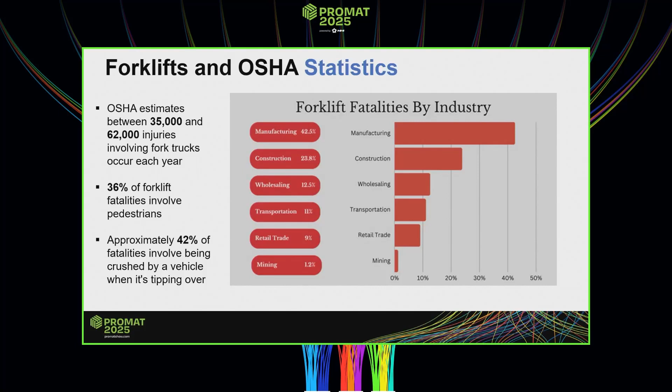Some forklift and OSHA statistics directly from OSHA: they estimate between 35,000 and 62,000 injuries involving forklift trucks each year. Manufacturing leads at 42% of all fatalities by industry. 36% of those fatalities involve pedestrians, meaning someone not on the forklift, and 42% involve a forklift tipping over. These are horrible statistics, but I think that's what makes us passionate about educating to help prevent those and give you solutions to help drop that number as close to 0 as we can.

So when we break it down into the 3 categories—your people, your product, and your place—first, when selecting your barrier or identifying the problem in your facility, you need to identify the hazardous areas. Where are the areas that are non-compliant that could be hazardous to your personnel or equipment? What resources and solutions are available?

When looking at these first 2 options, consulting a ProGMA member right off the bat is a great option. I know we're all willing to come out and consult to guide you in the right direction on where we see these hazardous areas. Finally, how do you select the right solution and vendor? Again, if you have someone available to consult you through ProGMA, it should give you the right solutions and vendor, talking through the problems you may face.

Once you implement the solution, you can look at whether the implementation reduced the hazard. Also understand if there were any unidentified consequences or benefits to that solution—it may have slowed down operations, but in the same sense, you protected against an incident. And finally, how do you quantify your ROI?

And your return on investment. So for considerations for ROI, we're talking about people, and we're talking about injury prevention.

Personnel commonly need access through the facility through potentially hazardous areas, whether that's the shipping receiving dock, manufacturing, or production. They may be walking in the same area as forklifts, AGVs, pallet jacks, production equipment, manufacturing equipment. If they're walking along elevated surfaces, whether that be racking or mezzanines, products could potentially fall off those elevated surfaces and strike the employee.

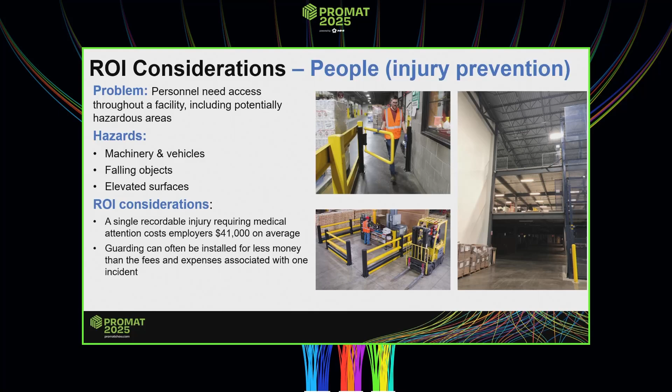So when you consider ROI, a single recordable incident requiring medical attention is $41,000 to the employer on average. Guarding installed in those areas can often cost less than one single incident with one of those employees.

On top of the injury costs, you have days lost with employees. This is all work-related injuries in 2022, not just forklifts, not manufacturing, all work-related injuries. 108 million days lost in 2022 due to injuries. The injuries that happened in 2022 caused 75 million days lost. Injuries from prior years that rolled into 2022 was another 33 million. And in future years, they estimate another 60 million days lost from 2022 injuries.

And there's a cost associated with those, $167 billion cost to the employers. Per worker, it's just over $1,000, and per fatality, it's just under 1.4 million.

We're talking about the product, we're talking about your inventory protection. So protecting your inventory, whatever you're distributing or manufacturing. Estimates suggest that 1% to 2% of all warehouse inventory is damaged by forklifts annually.

73% of our facilities reported losses due to damaged product based on forklift impacts. While we don't understand the value of your inventory, it could be computer chips, it could be paper towels, we don't know, but that's a good way to calculate ROI - by knowing the value of the product you're shipping out or receiving, because it could be a scenario where one single prevention of an impact could pay for the guarding itself.

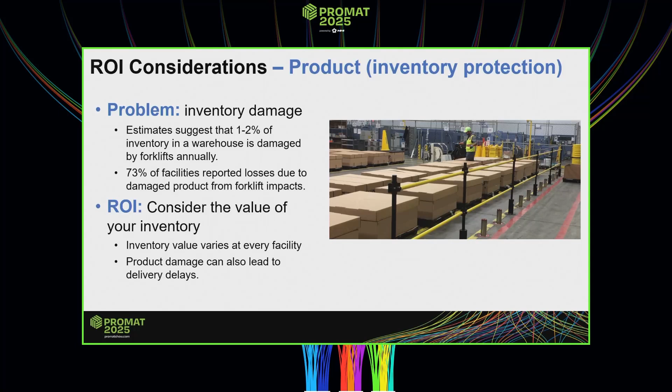And not only are you protecting your product, but there could be additional consequences of delivery delays, lost contracts, lost sales. And finally, the place, talking about your facility.

And this is the widest variety because there's a whole lot of things that fall into your facility. We're talking about building infrastructure. It could be columns, electrical panels, walls, floors, production equipment, manufacturing equipment, the loading docks.

This one speaks to me just from loading docks specifically. We had a customer that had a smaller facility, about 8 doors that ran 24/7. They had a door that got damaged - it was hit by a forklift. That door went down and they called us out for an emergency. It was an emergency because they told us that if their door is down every day, it costs them upwards of $20,000, because they cannot ship product out of that door.

So again, that goes into the opportunity cost of the downtime. If you strike a piece of manufacturing equipment, how long is it going to be down? Is it going to be a day? Is it going to be weeks? How long is the repair going to take? So those are all opportunity costs.

And then if you continue to do this and not protect your product or your place, insurance premiums are going to increase. And then maintenance costs is directly tied to what barrier you select. Whatever barrier you may put in place to protect your place, is it going to get damaged if it gets hit? Are you going to have replacement rail costs? Are you going to need painting and maintenance on those? If it gets hit, is there going to be concrete damage?

And Dave, I know specifically you have some firsthand experience from concrete damage of what you've seen with your customers. Yeah, I have. It goes back to just the downtime and the opportunity cost that's lost as a result of the concrete being damaged. I think it often gets overlooked, the complexity or the time with concrete damage.

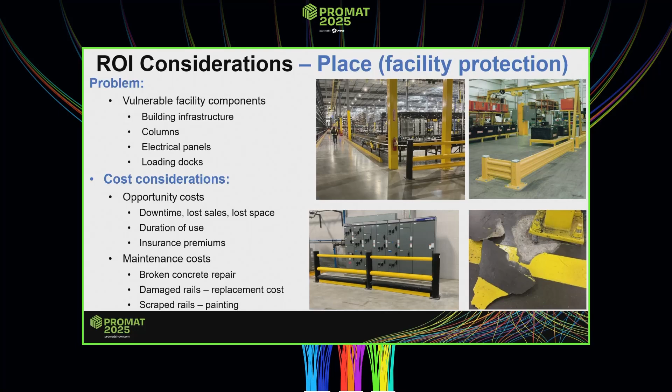For full concrete to go through the entire curing process takes up to a month. So to do it right, there are a lot of considerations that need to take place in that respect. So all things to consider when you're thinking about selecting the right barrier. We're going to get into some specific examples involving your people, your product, and your place.

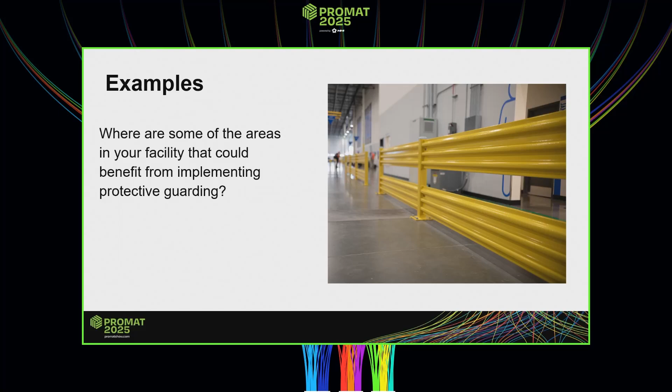Now we're going to look at some specific scenarios where you can preemptively install some protective guarding to get the best return of investment. In the material handling industry, we're trying to maximize the cube. That's where you get a good return of investment. So you're building up. You're building these structures for storage, for work platforms, production areas.

And when you're building structures up, you want to make sure they're properly guarded. So you obviously want to have guard railing around the perimeter of these structures once people have access to get up there. Oftentimes, you'll have an opening in that railing where you're transferring palletized material up and down with a lift truck, and you want to make sure that those areas are properly guarded.

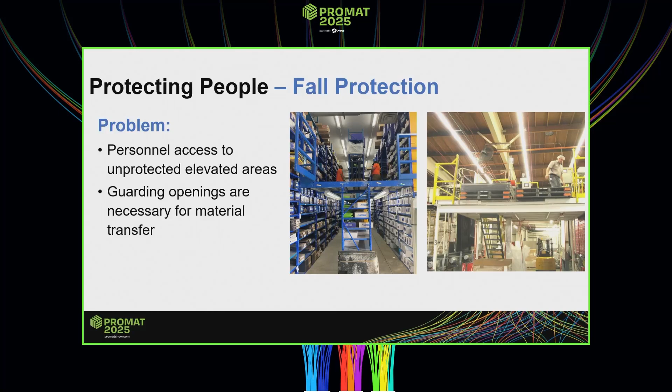So you always want to follow the OSHA codes whenever we're dealing with any type of fall protection hazard. For anything involving falls, it goes under OSHA code 1910 for floor openings and wall openings. And they want a barrier to be in place at all times except when you're actively moving material through there. Now, the thing about OSHA is they're covering a wide range of scenarios. They're not specifically talking about pallet drop areas. They don't specifically target scenarios like that.

So I recommend people follow the ANSI standards whenever you have any question about what you should use for guarding. ANSI standards are written by professionals in the industry. They target very specific hazards and very specifically tell you how to address those hazards. You can't have an ANSI standard that violates OSHA. So if you're following ANSI, you're following OSHA.

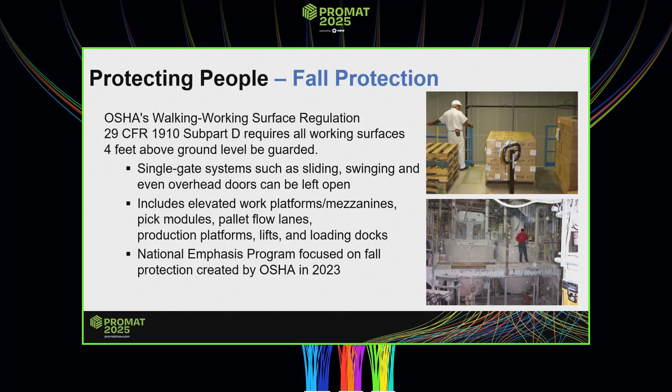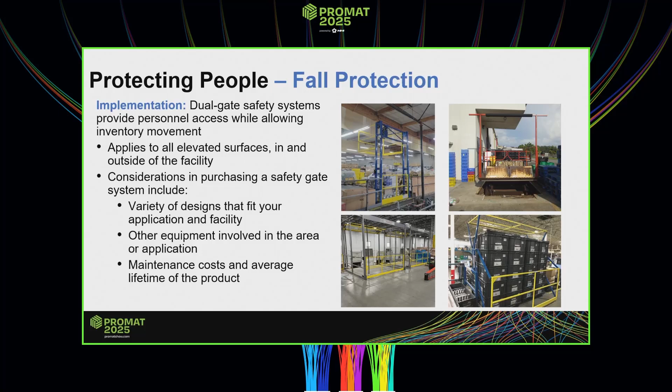ANSI in this case has a standard involving securing pallet drop areas on elevated levels. And they want you to have what we call a dual gate system, which is a barrier that's in place at all times. What that means is you have a gate at the ledge, you have a gate behind the pallet, and the gates are interconnected, so one gate is always closed. And that way, no matter what stage of the operation you're in, loading, picking, whatever you're doing, you have a barrier in place and you're sure to meet OSHA requirements.

An opening on an elevated work platform is considered an OSHA violation. That's a willful violation. That's a $15,000 fine for every opening, every time it's open. I had a customer that had a powered single gate that went up and down, and when OSHA came in for an inspection, that gate was in the open position. They said, oh, that's a violation.

The inspector said, no, the person working in the plant said, no, I can just push a button and that gate closes immediately. And OSHA said, no, that's not the way it works. We come through when it's open, that's a violation. Fortunately, in that scenario, they put in a dual gate system and they abated the fine.

But we're talking about these $15,000 fines for willful violations for every opening, every time they're open. And that's without someone getting hurt. I mean, if someone gets hurt, it's a whole different ballgame. You get lawyers involved. They might shut the plant down while they're investigating it. So you always want to have this protection in place, and you want to do it proactively before you have an issue. You want to consult with people at the ProGMA so what you're getting is going to fit your space constraints and what you're bringing up there in terms of material.

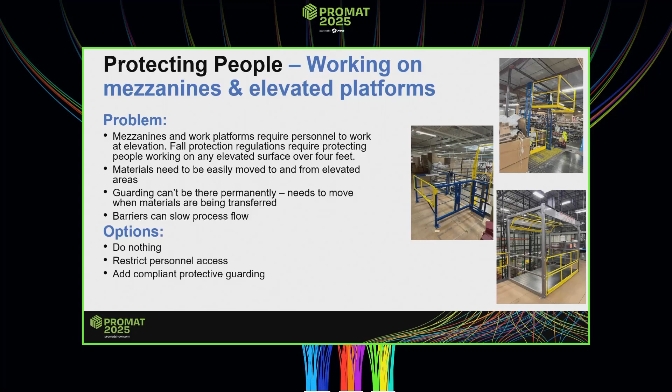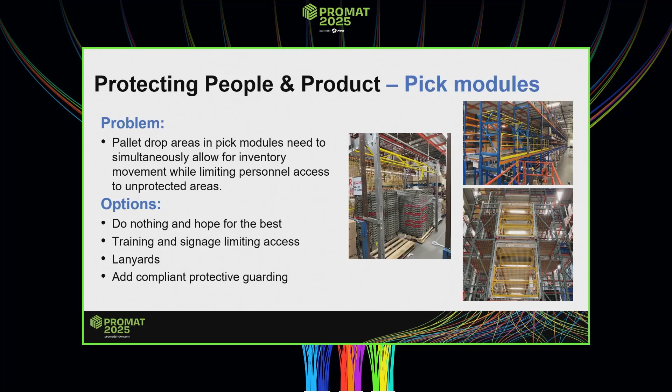And I tell everyone, when you're in your plant or in someone else's plant, you always want to look up. That's where these hazards come in. So we were looking at mezzanines and elevated platforms. The same hazards apply to structures made out of pallet rack, what we call pick modules. These are systems made out of pallet rack that people are working up in. They're breaking full cases and knocking them down and reducing them down into smaller packages. And those areas, if they're over 4 feet by OSHA code, they have to be guarded. They should be guarded that same way with a dual gate style system.

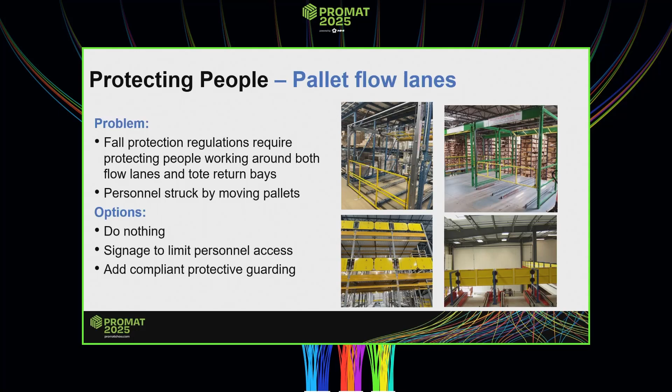We also have that same scenario with pallet flow lanes. A lot of times you'll see these on elevated levels where it's multiple pallets deep being pushed into a flow system, 2, 3, 4 pallets deep. If they're above 4 feet, they should be guarded. Even though people aren't working at those ledges because the pallets are flowing to them, if they have egress to those ledges, they should be guarded, and they should be guarded proactively. You can do that with a dual gate system, so there's always a gate in place, or a pallet flow gate device that's a self-closing gate that will swing open when the material flows in and then close behind them.

Again, when we talk about looking up into these areas, even if people aren't up there, we're maximizing the cubic space. We're building these rack structures to store products, and the concern is products coming out and hitting people walking down below. So you want to make sure if you're storing pallets in a rack system that you have some type of barrier in the back of the racks to contain those products.

The two main ways to do that is with a netting system that stretches across the width and height of the bay, or with a steel mesh system. What works best for you really depends on what you're storing and your process, and that's where you want to reach out to folks at the ProGMA for the best solution.

Now I'm going to turn it over to Dave Dulesky, who's going to be talking more about securing utilities and facilities. All right, thank you very much.

So for my slides, really what I just discussed is talking about sort of the gotcha areas within your facility and the impacts that can have on your business in terms of disruption. The first area to discuss are those utilities - your electric cabinets throughout the business. I would also argue your IDF closets need to be considered in the same context, because if your network communications and telecom systems go down, it can be just as disruptive.

So the problem is I've got these assets in my business that I have to provide some level of protection for. Certainly my options are do nothing - certainly don't recommend that, let me be clear. The second option, you could try to convince your forklift drivers to drive slower, or look at warning signs, and everywhere else I've been, that's always a challenge. So good luck with that one, I'll just say that. You could reroute your traffic, all right.

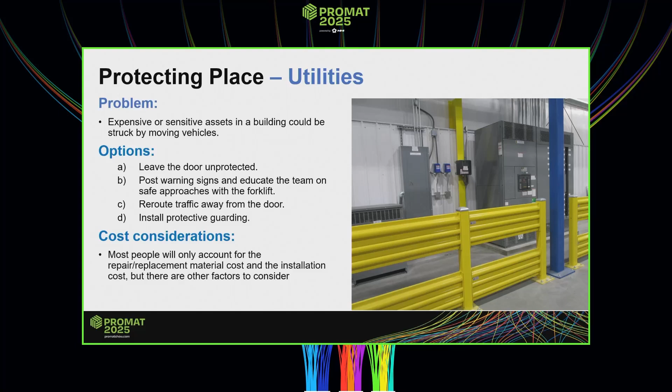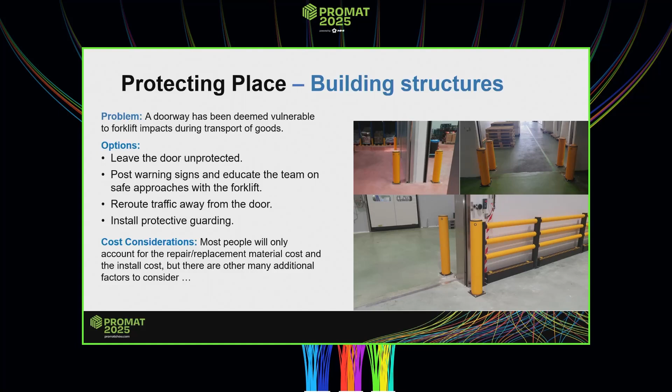Some examples - again, options are really very similar to before. Do nothing, tell your forklift drivers to drive slower. Again, my personal recommendation is install that protective guarding to prevent this, because as simple as it sounds, this can be a pretty cost-effective solution against other consequences and cost considerations.

I've identified about 12 different cost considerations and areas you need to have for this. Is it a high traffic area, low traffic area? Do I have to shut down this area to be able to provide that maintenance and repair if I do nothing? I've seen instances where tuggers have gone completely through walls. This actually just happened recently in an airport in Florida, unfortunately.

I've seen consequences where a forklift has actually taken its forks and gone directly through a steel I-beam. It happens, right? And you're nodding your head, you agree.

So yes, we are talking about door jambs, door frames and so forth, but there's some serious implications to the building structure and integrity itself. If I impact that, nothing's saying that this isn't going to crumble, and now I don't have access from one side of the building to another.

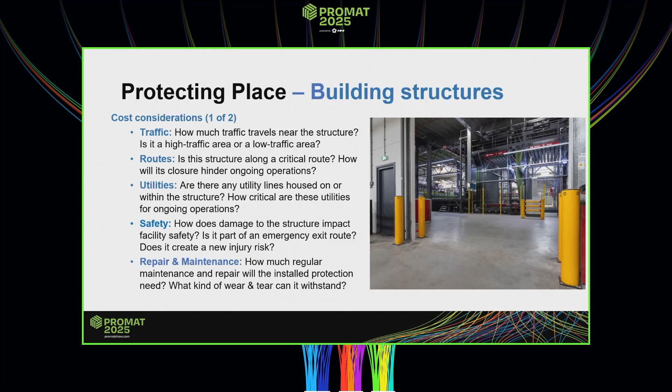I may not have access, and that impacts things from a safety perspective. Did I just limit the ability for an evacuation route through my building if there's a fire, or maybe chemicals are spilled? What is that repair and maintenance cost?

All these things to take into consideration. What is the cost of the repair? What is the cost of putting that in? The delays, if I can't get from point A to point B, your lost opportunity cost and downtime, the congestion, having vehicles maybe have to stop at a red light and not just do a continuous movement. Lastly, the workspace itself—have you impacted your employees and their overall safety?

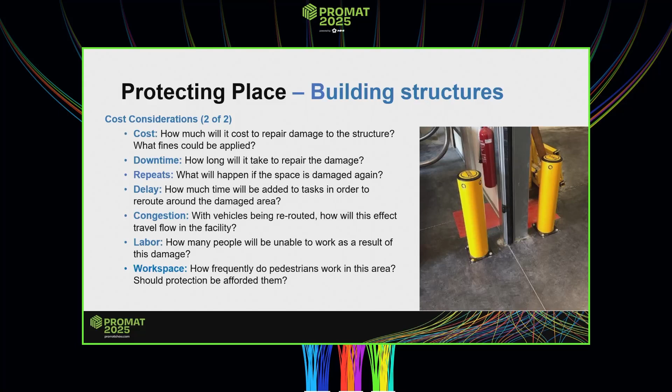From my side, the intervention here and the quick call to action is there's 23 members within ProGMA. I would encourage you to come and talk to any of us, and we can provide you a risk assessment for your facility. Ultimately, I think what we're trying to minimize is risk, whether it's risk off a mezzanine, risk of product placement, which Jim will come talk about.

It's about minimizing risk. Once you minimize risk, we can improve or at minimum maintain operational efficiency. And I would argue that safety is a byproduct of that—you get safety for free by doing everything else right.

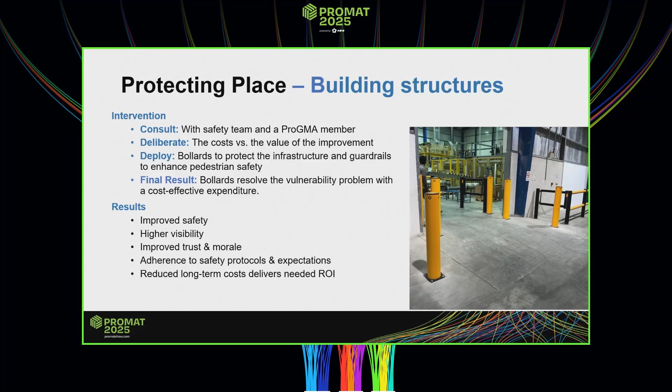Thank you, Dave, that was great information you had there. Just a few things I want to regurgitate here that came from some of our other speakers when talking about protecting your product and inventory—some of the stats that were brought up.

1 to 2% of your inventory typically is damaged on average, and 73% of that damage is caused by forklifts. Also, ROI on safety is 6 to 1—so 600% savings. It's a no-brainer to see the savings in this, and you'll see some things here that show a much higher ROI you could experience.

An experience I've had with a customer—he brought us in to assess the rack damage they had. They were having a lot of repairs done, and they had actually created a monthly budget of $7,500. So over 12 months, that's 90 grand they had for rack repair.

At the same time, they had this contractor in the facility a lot longer than they should be, and they should have been covered under their liability insurance. So there was risk to their insurance, some issue with their insurance, as well as damage to the inventory.

So what we did, we introduced a couple of products—one attached to the rack, and some guarding, just like this. What that did for him was eliminate practically all of his damage. He was able to eliminate that $7,500 a month budget, experience instant savings, and at the same time cut down on his damage tremendously.

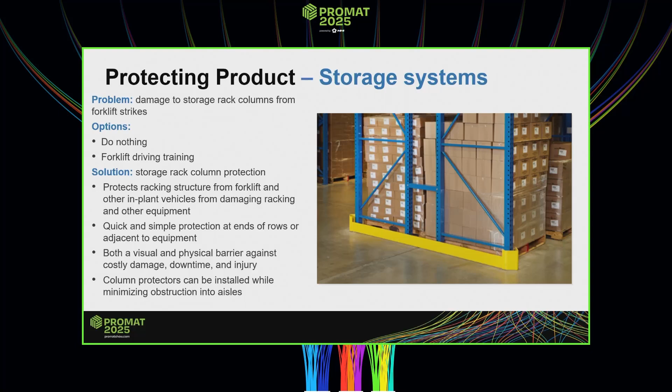Now, of course, there's still going to be a little damage, but at this time it's very limited. They don't have the contractors in-house every day or every week, so they've eliminated that risk and that liability.

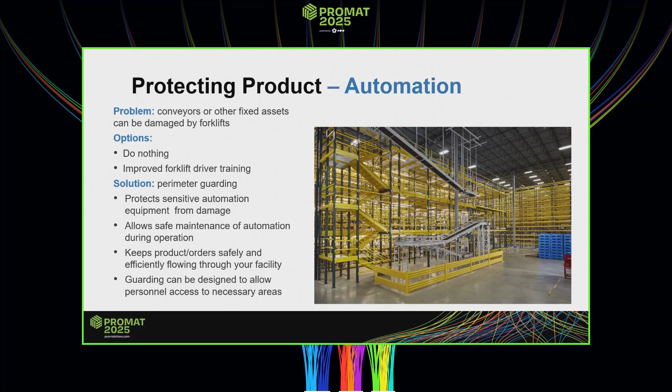Again, protecting your inventory, your product—that's your profit center, your revenue source. So here's a situation: you've got all your product running through these systems, these conveyors. If that gets damaged, that is a lot of downtime, weeks of downtime there. So just a simple barrier will keep that protected.

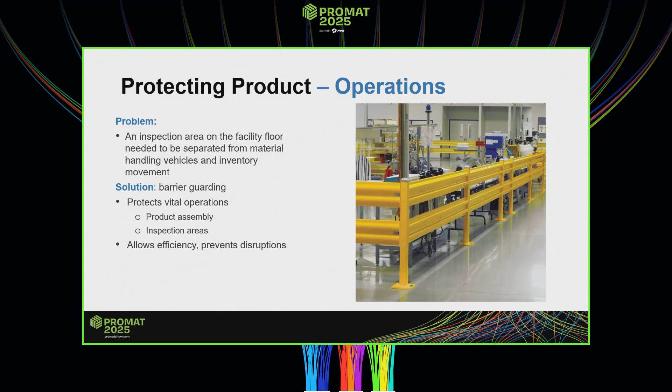Protecting operations where you're building inventory—so here's an assembly and inspection area. This is going to keep your product a little more secure, organized, and also provide a little safety from impact.

Oh, I'm going to go back one—sorry about that. So when you're putting in some of these protective measures, in my situation I'm talking about inventory, but some of this equipment can have a triple effect.

If you have netting on the back of a rack, that's going to keep that product from falling down and getting damaged. It's also going to keep that product from falling down and injuring a person, and keep it from falling down and damaging your facility.

So again, as these guys have mentioned, reach out to your ProGMA members—we can help with your assessment, with your solutions, and show you these returns on investment.

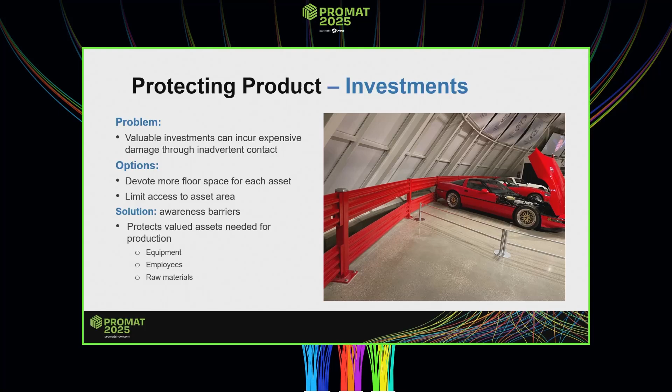Just some final thoughts here. Costs associated with incidents can be a function of lost productivity, litigation fees, citations, and injury expenses.

Installing and maintaining the appropriate protective guarding in your facility can protect your people, your product, and your place. Oftentimes, protective guarding is less expensive than one singular incident.

As they've all mentioned, consult your ProGMA professionals. Evaluate your specific applications and problems, and we can talk through some solutions.